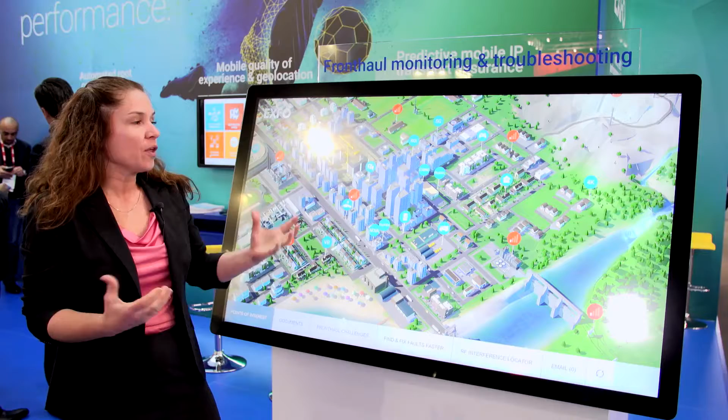So really the challenge comes from the evolution of the network going from 4G to 5G. It'll put a lot of pressure on the front haul network, where an enormous amount of bandwidth will be required, and lower latency. So service providers are really ramping up the front haul and making sure that it will be able to sustain the 5G requirements. But one of the key challenges around front haul today, and it'll get even worse going to 5G, is really the amount of interference in the network.

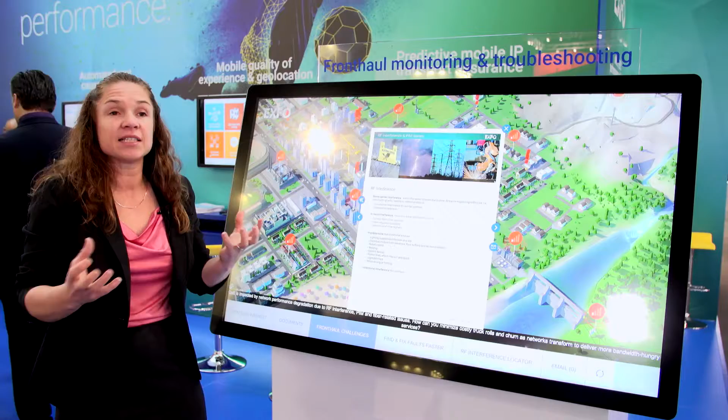So interference really comes from quite a bit of different sources. If we look at the different sources, things like internal coming from the network, same carrier interference, in-band interference, but also quite a bit of external interference that impacts the network. And the sources are almost limitless, things like lightning. You could have big screens in concerts that are generating interference. It could be a single small piece in the network of the service provider that creates problems.

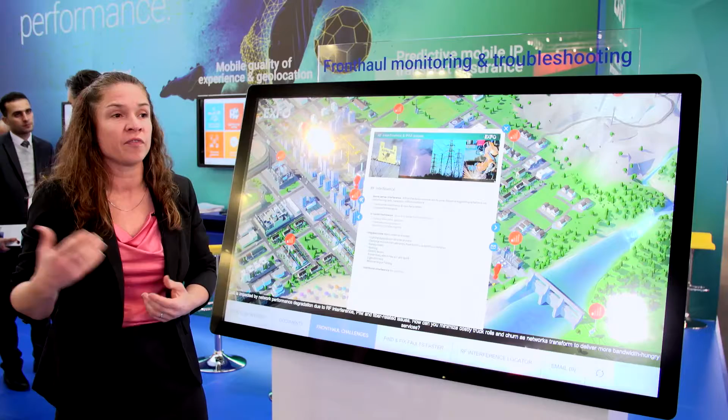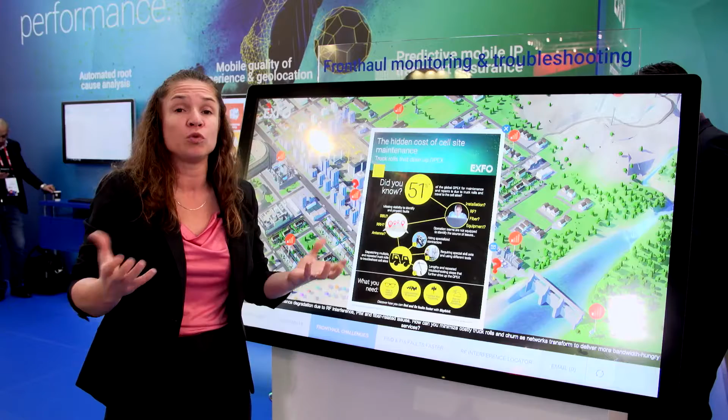And obviously these interferers create an important headache from an operator's perspective, because they actually generate a lot of operational costs. Typically technicians have to go out, investigate, first find if there's an interferer, understand where it sits. Is it in the front haul? Is it internal? Is it external? So a lot of troubleshooting. An interference problem can take up to a month to investigate and fix. So it is a very high cost in terms of maintenance in the network.

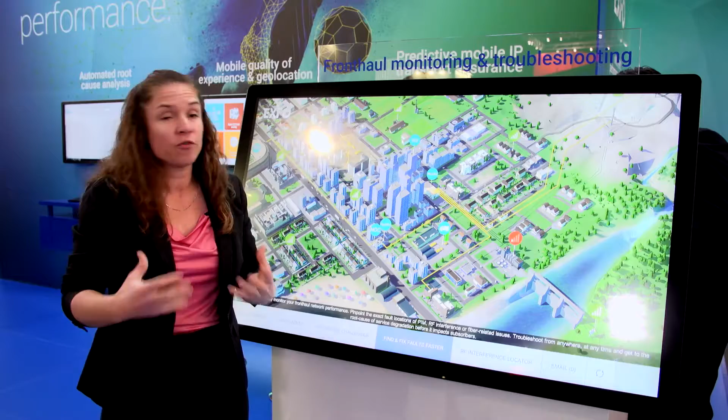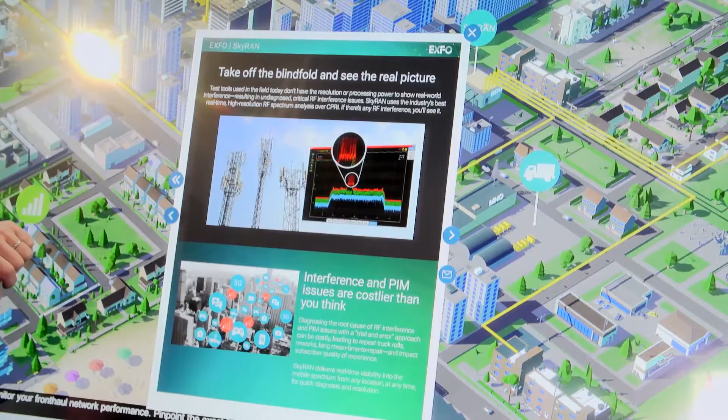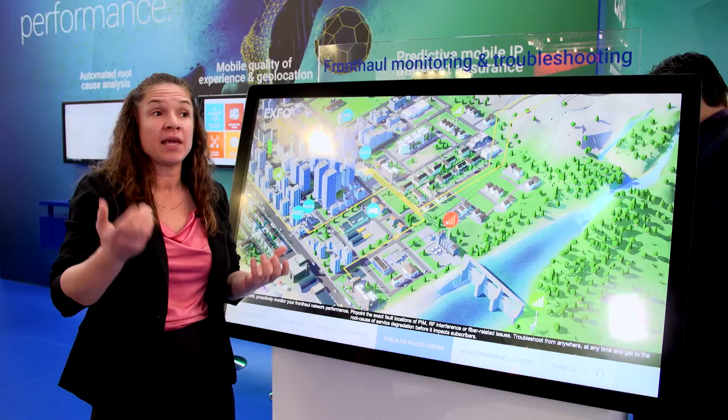And this is really where the SkyRAN solution comes in. With the evolution of the network, with the C-RAN allowing to put the BBUs at a central location, it really gives access to the RF signal at the centralized BBU location through the CPRI signal. So installing a SkyRAN system at the BBU hotel allows you to have visibility on all of the towers of that sector and see if there's interference or PIM on the network, and also monitor the health of the fiber in the front haul network.

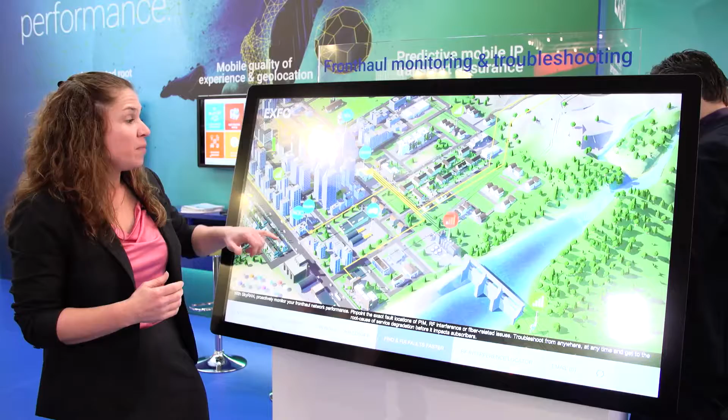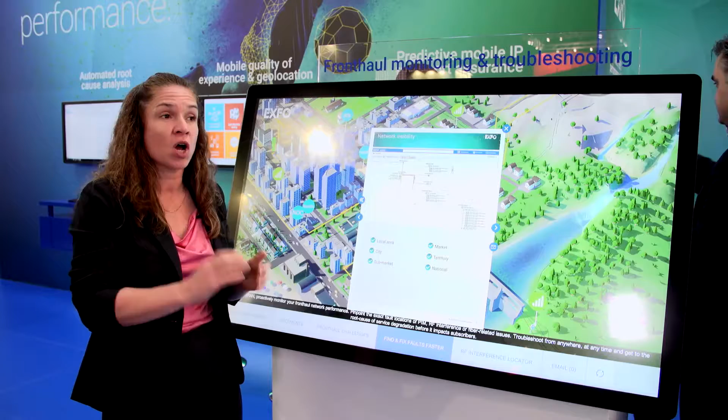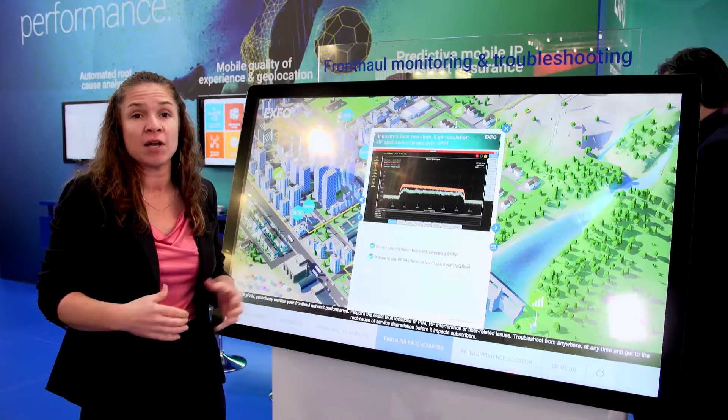So what that allows is now, from the NOC or even remotely from an office, the service provider can actually see the network and see if there's an interferer remotely, without having to roll the truck, without having to go to the cell site. And basically alarms can be generated if there's PIM, if there's interference, if there's a fiber cut, understanding exactly where that issue sits. So when they do actually send a technician, they can send it with the right equipment, at the right time, at the right location, with the right information to fix the issue. So it really saves quite a bit of time and operational expenditure for the service provider.

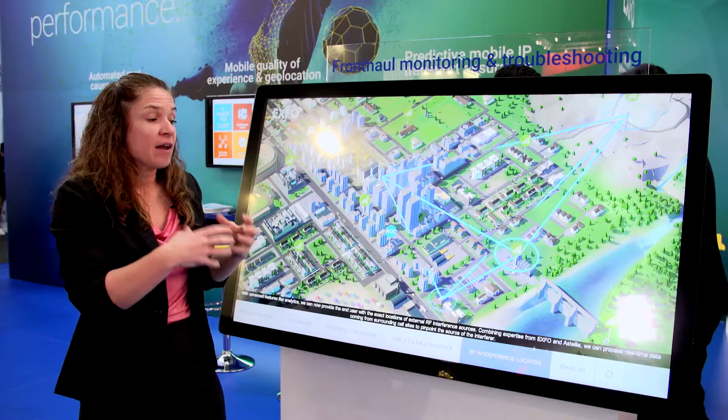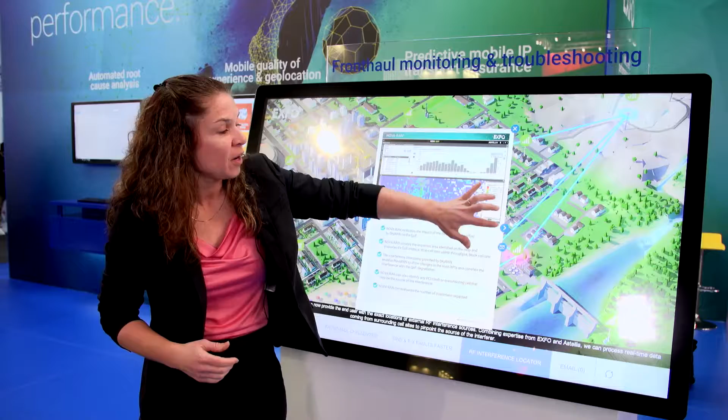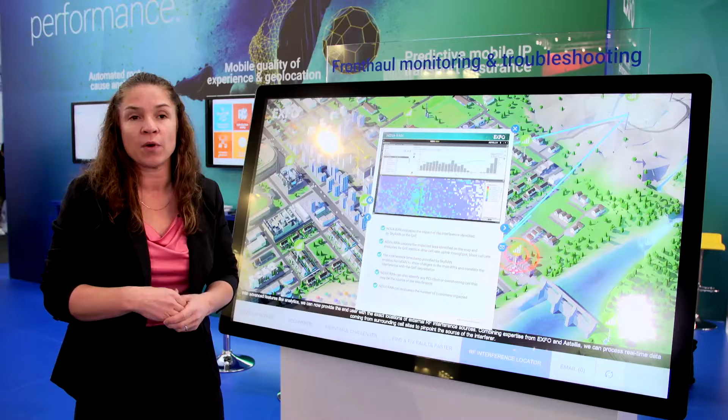Going further than that, the SkyRAN system can actually triangulate the location of the interference in the network. By looking at signatures around different cables, different towers, it can tell you exactly the location of the interferer. And from that, with our new joint solution with the Astellia product, we can go even further and provide very important information around this interference, looking at the call trace, understanding if that interference is service affecting for the operator, how many users are affected by it, and if there's an impact on the bandwidth to the UE.

So it really helps in terms of prioritizing the issues of interference, and really making operational expenditure and operational teams more efficient, and really fixing the right issues at the right moment.